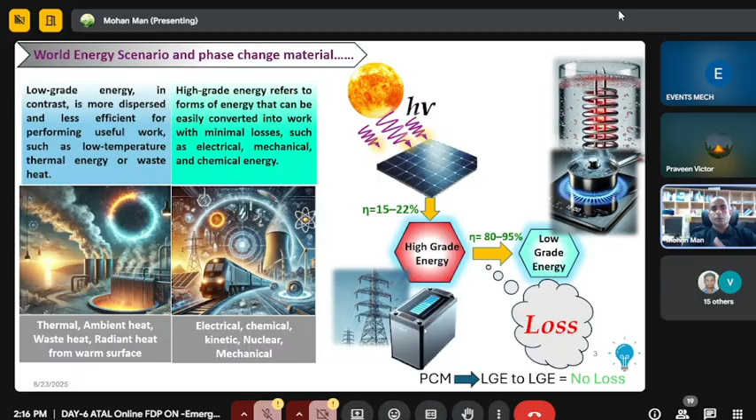Now I would like to introduce phase change material. First, I will introduce phase change material with ice and water, because it is a very fundamental material that we have known since childhood. Ice and water is a phase change material that exists in three phases: ice, water, and vapor. Based on temperature and pressure, the same material exists in three different phases. So I can consider it a phase change material because it interacts with heat and changes its phase. Whenever a material interacts with heat and changes its phase, I will consider it a phase change material. So the first example was ice and water.

Similarly, paraffin wax is the most common researched and even industrially applicable phase change material. Paraffin wax, or simply wax, is generally used in our daily life to make candles. So that is a phase change material, paraffin wax, which is an organic phase change material. And the third category is salt hydrate, that is also a phase change material. In the next slide, we will discuss salt hydrate.

What is the property? Salt hydrate is also a phase change material. Among these three, what I am showing in this slide is we can differentiate among them through the melting temperature or melting point. The lowest melting point or lowest phase change point of the three phase change materials is ice and water. After that, paraffin wax comes in the picture, with slightly more phase change temperature as compared to ice water. And the third one is salt hydrate, which has the highest phase change temperature among these three.

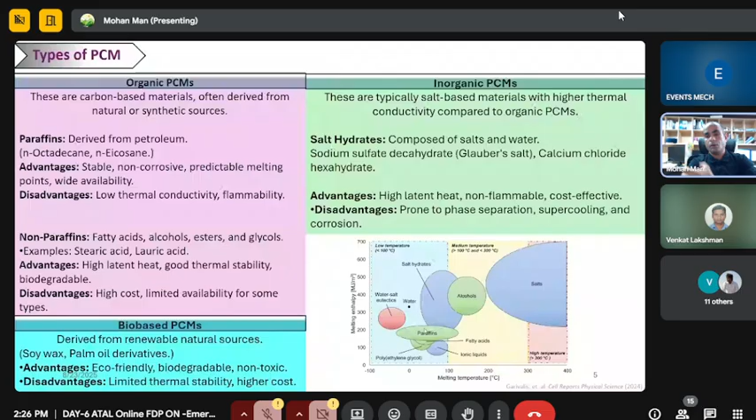Now, the fundamental principle of how phase change material works to store heat when used as a latent heat thermal energy storage. I would like to introduce latent heat and sensible heat. Before understanding the principle of phase change material, we should know sensible heat and latent heat. So first, sensible heat - what is sensible heat?

When the temperature changes and the material remains in its same phase, with no phase change, and temperature is continuously rising, that is considered sensible heat. Whereas when the temperature becomes constant and the phase of material changes, like from solid to liquid or liquid to solid, that is considered latent heat. So the thermal energy storage system works on two kinds of heat: sensible heat and latent heat.

So this presentation is basically meant for latent heat thermal energy storage, when the material is changing its phase, rather than sensible heating.

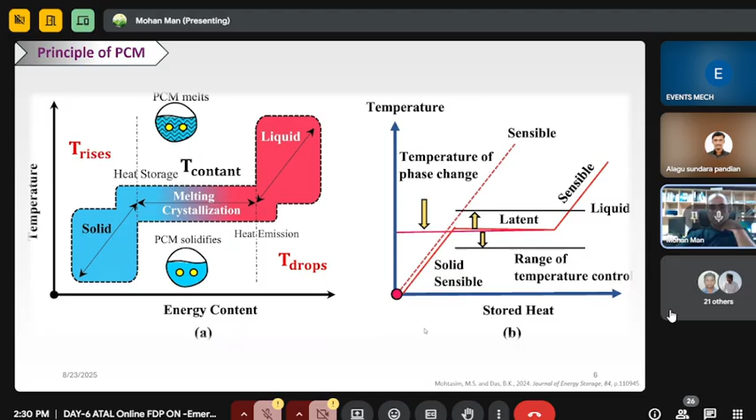Now, after this introduction of phase change material, the limitation of phase change material - this limitation, I can say, becomes the research area for phase change material. Basically, all kinds of phase change material suffer from low thermal conductivity.

You can see most of the PCMs, whether organic or bio-based, even inorganic and eutectic also, they have thermal conductivity in the range of 0.15 to 0.70. That is a very low thermal conductivity.

If you compare with the thermal conductivity of copper, we can say it is about 1,000 times lower than the copper thermal conductivity. So all these phase change materials always suffer from low thermal conductivity.

My major focus, as a material science background researcher and not from mechanical, is the inherent thermophysical property that deals with thermal conductivity. Apart from that, other thermophysical properties are also important, like latent heat, which we will discuss in the next slide. So thermal conductivity is a major challenge for phase change material to integrate for latent heat or thermal energy storage.

Apart from that, other limitations are also there for phase change material, like supercooling, phase separation, volumetric expansion, cost, corrosion, environment safety, and thermal stability. These kinds of limitations are also there.

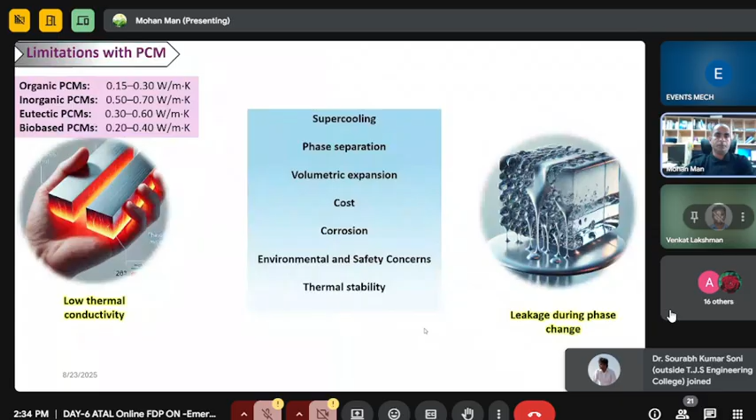Now, the required properties of phase change material. What properties are required from phase change material? These include thermal property, physical property, chemical property, as well as economical or practical consideration. Thermal property deals with high latent heat of fusion—whatever properties are mentioned here are required to develop a system. High latent heat of fusion ensures a significant amount of energy can be stored or released during the phase change. If the material has high latent heat, it can store more heat.

Then, appropriate phase transition temperature—it should match our input temperature. For example, if we are utilizing phase change material to store solar energy, connecting it with solar energy through a concentration solar collector, the temperature range will be based on the design, say around 80 or 120 degrees. So the phase change temperature of the material should match the input temperature, from where we are getting the heat.

Then high thermal conductivity is definitely needed for quick heat transfer during charging or discharging. Charging means melting of the phase change material, or storing heat; discharging means solidification, when it releases heat for utilization during the night time.

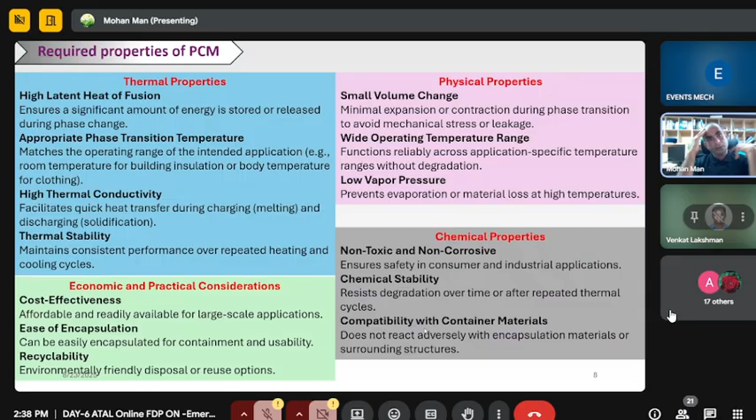Recyclability means that after a certain time period, say 2 years or 1 year, if we observe degradation in thermophysical property, the material will not perform as it did at first commissioning. In that case, if we want to recycle or dispose of that material, recyclability should also be considered. So these are some fundamental properties we need from phase change material.

Now we can see how the thermal energy storage material can be classified. Before starting the classification of the phase change material or thermal energy storage material, please consider this: sometimes I say phase change material, sometimes thermal energy storage material, because thermal energy storage material is a vast category. Different materials come under it, not only phase change material. Phase change material is one category of thermal energy storage material, so don't be confused between the two terms, PCM is a part of thermal energy storage material. As you can see in this picture, there are four types of thermal energy storage material, and phase change material is one of them.

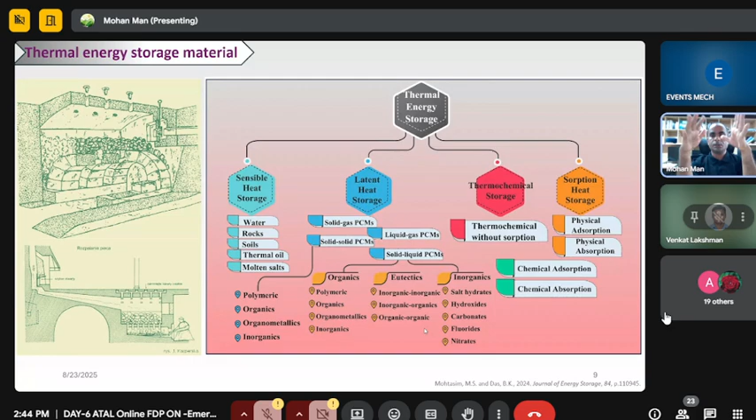But now the question can arise, why is TES implemented in this system? As I already told, TES is implemented to store heat during the availability of solar energy, to run the continuous cycle of this Rankine cycle, or whatever cycle is used to generate electricity. It is not possible to always get thermal energy from solar energy. So to store the heat for nighttime application to drive the continuous cycle, the thermal TES system is implemented through the phase change material.

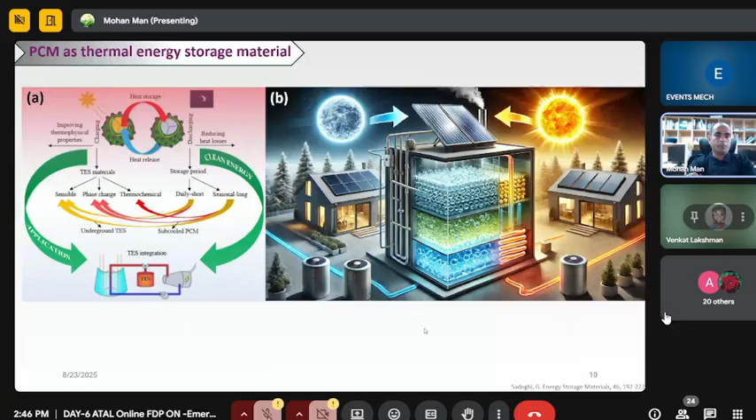Now, performance enhancement techniques for the thermal energy storage material. As we already discussed, phase change materials face certain limitations, particularly low thermal conductivity, which correlates with heat transfer. As the thermal conductivity is low, the heat transfer will also be low. So to improve the heat transfer, we definitely need to improve it. For any thermal application, heat transfer should be high. To improve heat transfer, we need to improve the thermal conductivity.

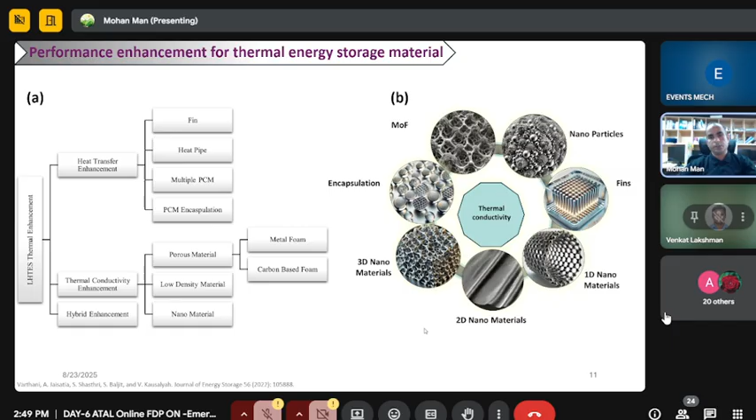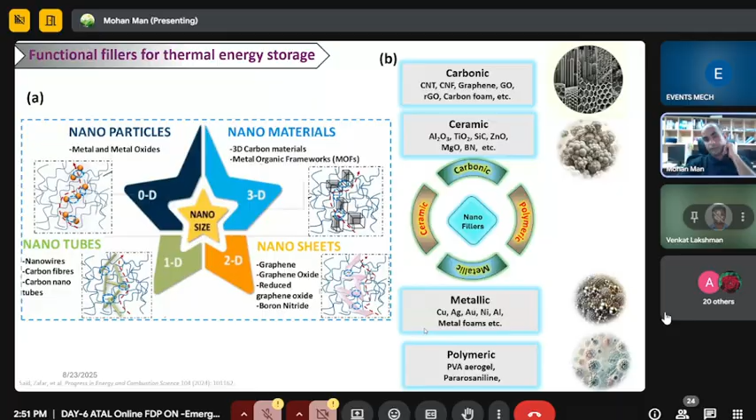Now the question arises, how can these 1D, 2D, or 3D fillers improve thermal conductivity? So, functional fillers and thermal performance. I am taking the example of CNT because it is the most widely employed functional filler for phase change material. Thermal conductivity through CNT increases significantly in PCM, enabling faster heat transfer during phase change. This improves the efficiency of energy storage and release.

Also for heat transfer, the addition of CNT reduces thermal resistance within the PCM matrix, ensuring uniform temperature distribution over all the material, so we get uniform heat storage in the phase change material or thermal energy storage system. High latent heat retention is another benefit.

One of the major disadvantages, apart from thermal conductivity, is that when we implement any functional filler in the phase change material, it reduces the latent heat capacity. The latent heat capacity of the phase change material reduces when we mix certain fillers. Why? Because the storage of heat takes place only in the phase change material, not in the functional filler, since the functional filler is not changing its phase. We store heat when the phase of the material is changing — basically we are storing latent heat. So who will store the latent heat? The material that is changing phase.

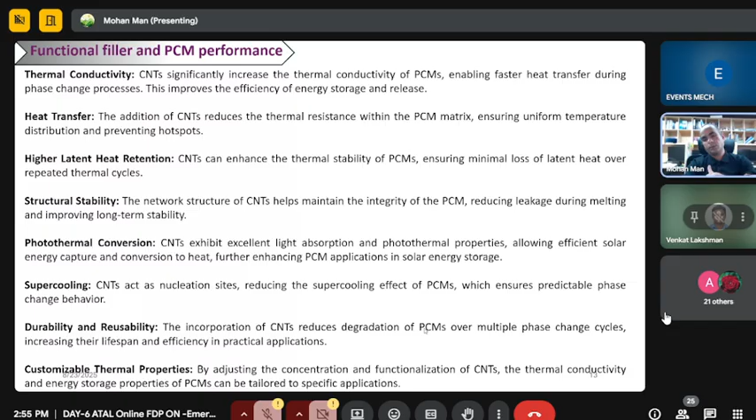Then there's supercooling, durability and reusability, and customized thermal property. Through CNT implementation, we can reduce supercooling because CNT acts as nucleation sites. When we mix CNT into the phase change material, it creates more nucleation sites, so the supercooling effect is reduced. For durability, CNT has such properties that we can use the phase change material for multiple cycles, improving durability. Also, by adjusting the concentration of the CNT functional filler, we can customize the thermophysical properties of the phase change material.

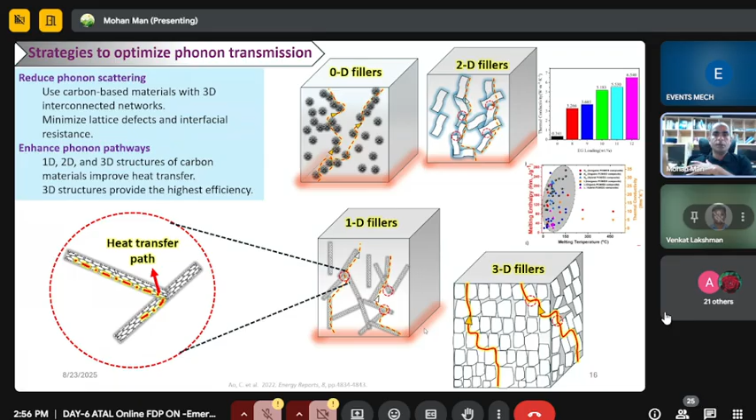Now, through this picture, I would like to explain how the functional filler improves thermal conductivity. Whatever the filler — 0D, 1D, 2D, or 3D — these all reduce phonon scattering, or in short, reduce the barrier to heat flow. We can say it provides a path: when we mix in the functional filler, it provides a path through which heat is transferred. These are the strategies that reduce thermal resistance and improve the thermal conductivity of the phase change material.

So phonon transport, what is it? Basically, phonon transport is responsible for heat transfer.

Phonon scattering is induced by the mismatch interface between the PCM and supporting material. Carbon material creates an efficient thermal pathway: a 1D material like CNT creates a linear path; a 2D material like graphene creates a planar, two-dimensional path; and 3D materials like carbon foam provide a network path that is more effective.

Through these 1D, 2D, or 3D materials, what we aim to do is reduce the thermal resistance, so that we get high heat transfer. Also, some chemical methods exist, like surface functionalization techniques, and through that we can also improve the thermal conductivity.

These chemical methods are for the functional filler, not for the composite. First we have to functionalize the nanofiller, then mix this filler with the phase change material, which will improve the thermal conductivity. So in these techniques, there are two types of functionalization: surface and chemical.

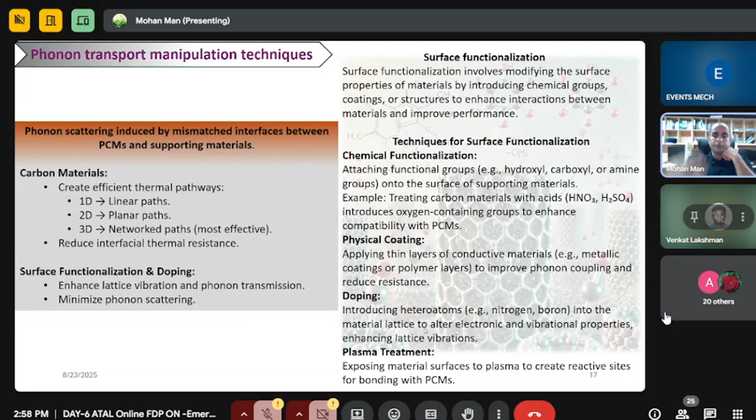So this is the conclusion on surface functionalization for thermal conductivity and surface functionalization for phonon scattering. Both are interconnected.

When we improve surface functionalization, it improves interfacial bonding, enhances phonon coupling, and aligns the lattice structure. This is a bit deeper into the material science background, so I'm not going to discuss it in more detail.

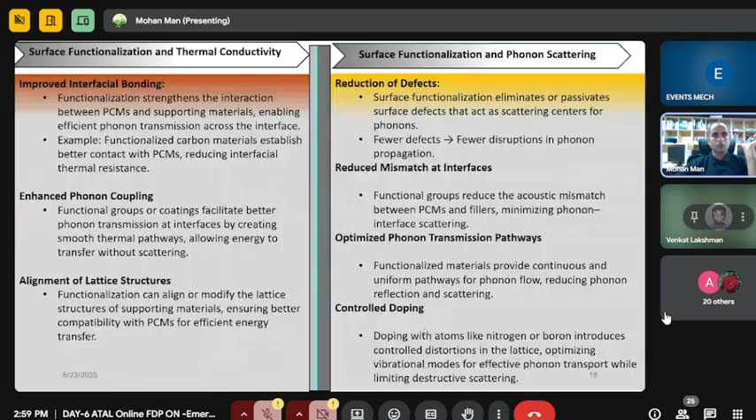I wish to show you some of my previous work, what we did using a similar approach to improve the thermal conductivity or thermophysical properties of the phase change material.

In our recent work, we mixed copper oxide functionalized CNT, meaning we decorated copper oxide nanoparticles on the CNT surface, so that we got improved results compared to pure CNT. Why? Because this additional attachment of copper oxide on the CNT surface creates more nucleation sites.

When the material changes phase from liquid to solid, there is a crystallization process. So if we mix this specific nanofiller, like copper oxide coated CNT, it creates more nucleation sites, so that we get a better response during the phase change. It will store more heat compared to pure CNT.

In this case, we synthesized the CNT, then mixed it with the phase change material through sonication. We prepared a uniformly distributed composite and obtained a solidified phase change material.

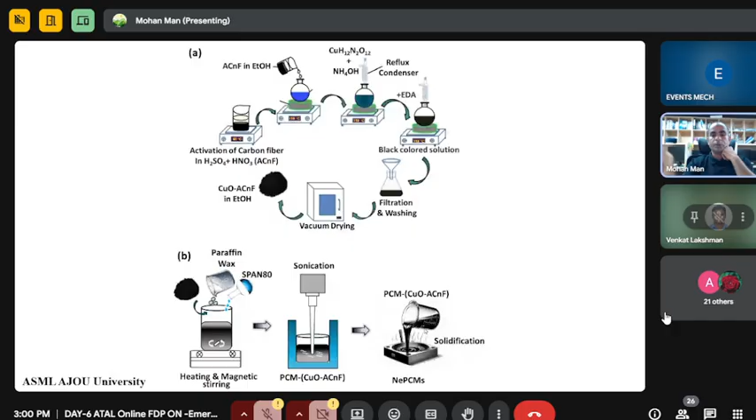After that, we did some chemical characterization to ensure the composite, to check whether any chemical reaction was taking place, through FTIR and Raman spectra. No such new chemical composition was observed. So we ensured that what we targeted was achieved without generating any new functional group.

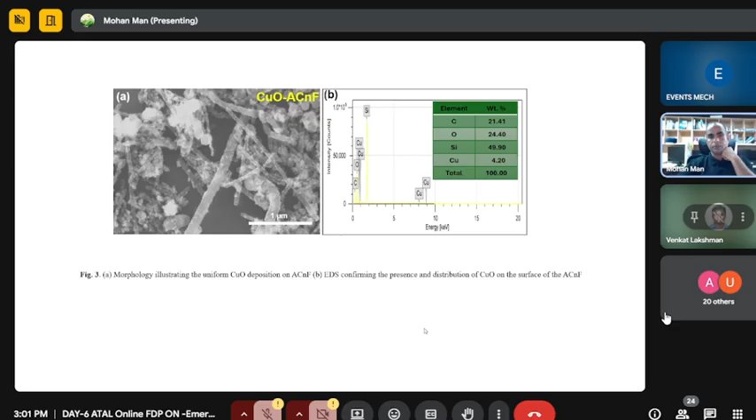So this is the distribution; we correlated the distribution. I would also like to introduce the importance of the distribution of the functional filler in the phase change material while synthesizing the composite. So we analyzed how the distribution of this filler influences the thermophysical properties of the phase change material.

We prepared four samples, changing the weight percent ratio of the functional filler in the PCM, and analyzed the distribution. We did thermal analysis - TGA, DSC, and thermal conductivity - and got significant results showing that such a functional filler, chemically functionalized CNT, gives higher thermal conductivity compared to pure CNTs.

The xenon bulb has been kept on top of our sample, which is paraffin wax mixed with copper oxide coated CNT, and we analyze how the temperature of the phase change material is changing.

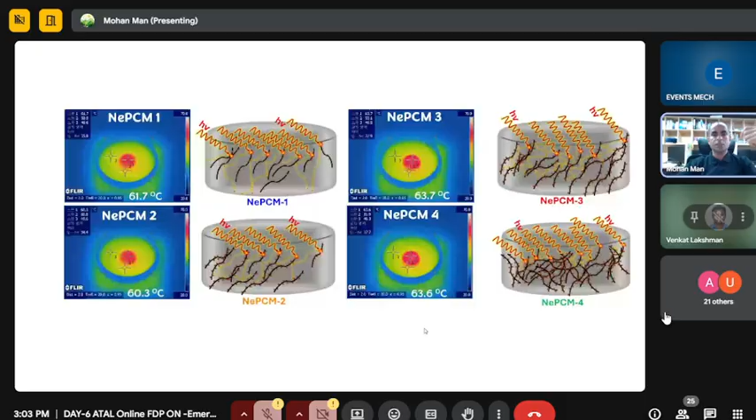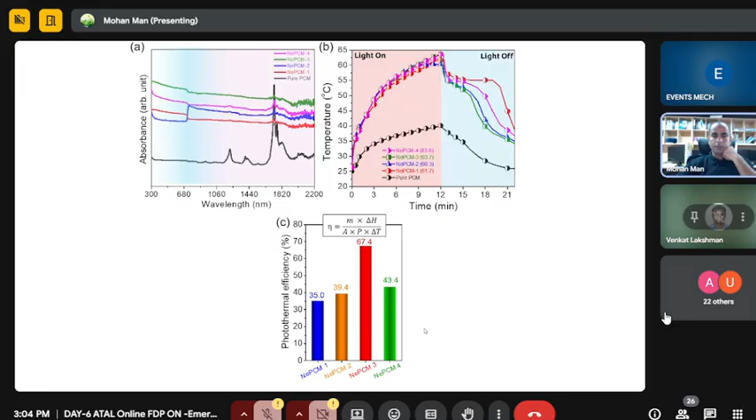Through this we can understand the importance of the functional filler. If we mix in a functional filler, the melting temperature can be achieved directly through solar light without any heat transfer fluid. So this kind of material can be utilized to store direct solar heat as latent heat energy storage material. We have also achieved a photothermal efficiency around 67.4%, which is a significant achievement with the copper oxide coated CNT mixed with paraffin wax.

The temperature drop of the CPU microprocessor has been analyzed with the PCM, because when the computer is processing, it generates heat. That heat needs to be taken away from the microprocessor, so we employed the phase change material to remove the heat.

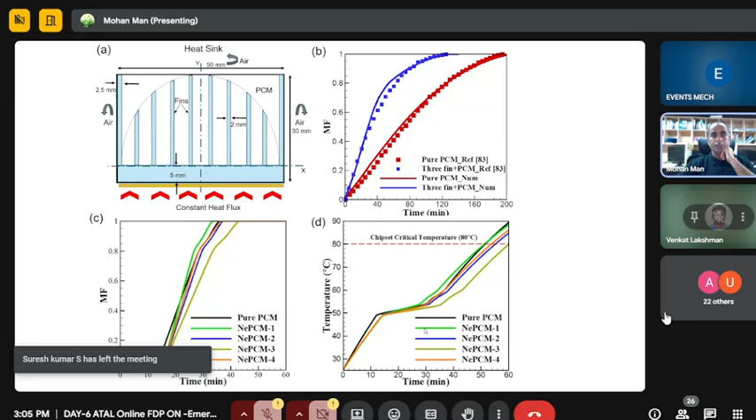So these are some results. I think this is another part, which I would like to show very briefly: multifunctional PCM. So far what I discussed is the thermal energy aspect. Now, regarding multifunctional PCM, I would like to say PCM cannot be used only to store heat.

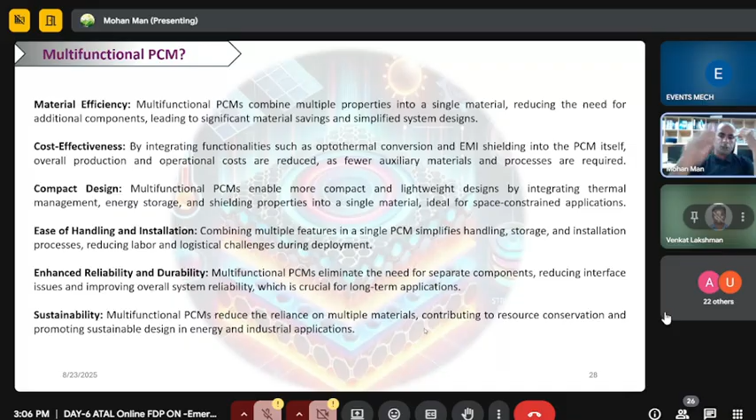Nowadays, when material efficiency, effectiveness, or conclusively sustainability is considered, if we are synthesizing a material, it should perform multiple tasks, not only thermal energy storage. In the case of PCM, it should not perform only one application, that is heat storage. Instead, we should aim for different applications, as I will show in the next slide.

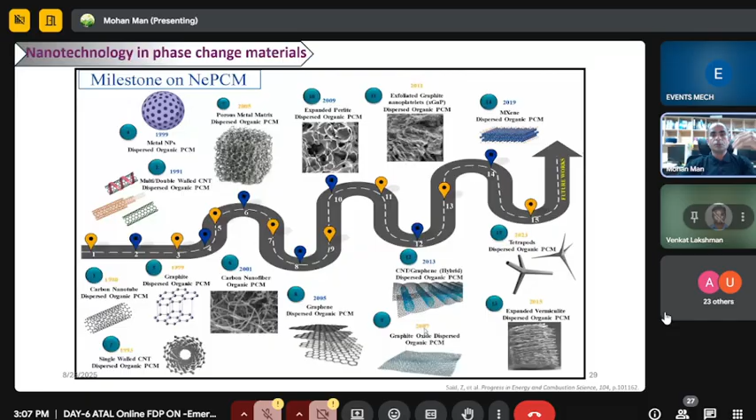This is the milestone timeline of phase change material for multiple applications. It starts from 1990 with CNT and has progressively increased; by 2021 nanomaterials like tetrapods have been utilized. Tetrapod is a specific design created by the chemical reaction of carbon material. So from fundamentals with CNT, development has taken place through different materials like CNT, graphene oxide, and others such as MXene. By 2023, various tailored materials have been designed and mixed with paraffin wax, or in general functional material, to get the desired thermal conductivity or designed thermophysical properties.

For multifunctional application, beyond just energy storage, PCM can perform different applications like cooling and heating of buildings, cooling and heating of wearables like jackets, or in life science. Thermoelectric generation: if we can create a temperature difference, certain thermoelectric modules can utilize that difference to create electricity. Similarly, electromagnetic shielding: if we synthesize a phase change material with certain nanofillers, that will restrict electromagnetic waves. Other applications include photothermal conversion and greenhouse effects, where we can use the phase change material between the walls of a greenhouse to maintain temperature. So phase change material is not only for storing heat, it can be used for different applications as well.

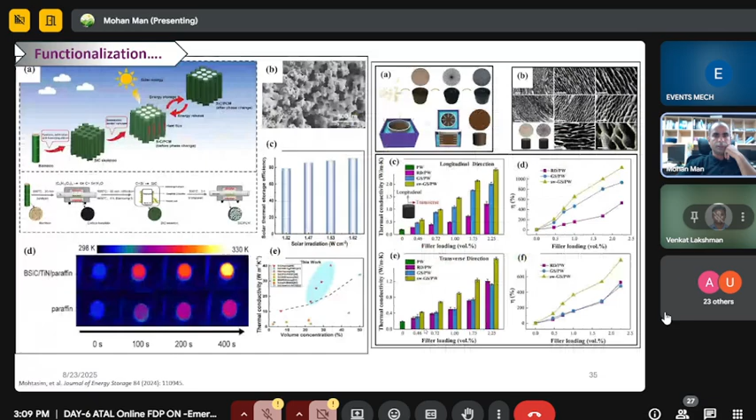These are some chemical structures which we will not discuss in detail.

Automatically a temperature difference will be created, and this difference can be utilized to generate thermoelectric energy. This is one application of thermoelectric conversion through phase change material. Even though the thermoelectric module can be implemented through different temperature differences, PCM can help generate a certain temperature difference even when there is no availability of a heat source. Why? Because PCM stores heat in the daytime and retains it even after the heat source disappears. After that, this heat can also be utilized in the thermoelectric module.

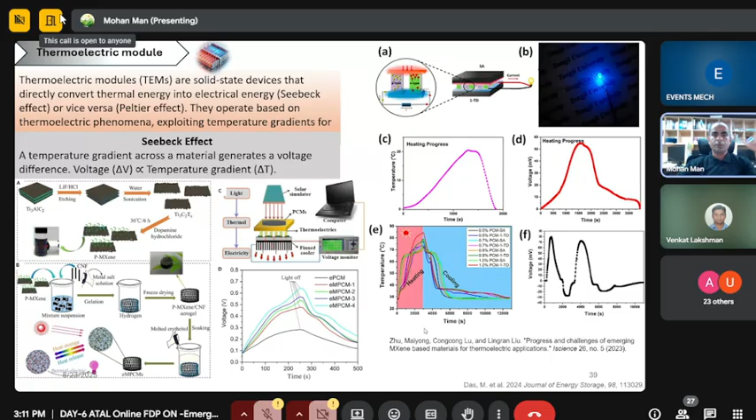This is a photothermal conversion setup. You can see in this picture, when light is incident, the temperature of the material rises, and further this connects to the thermoelectric module. Then again the temperature difference is created and utilized to generate electricity. These are some examples and research work for photothermal conversion.

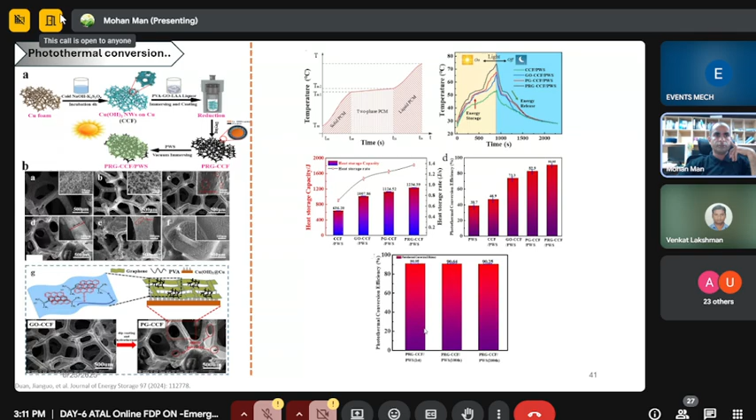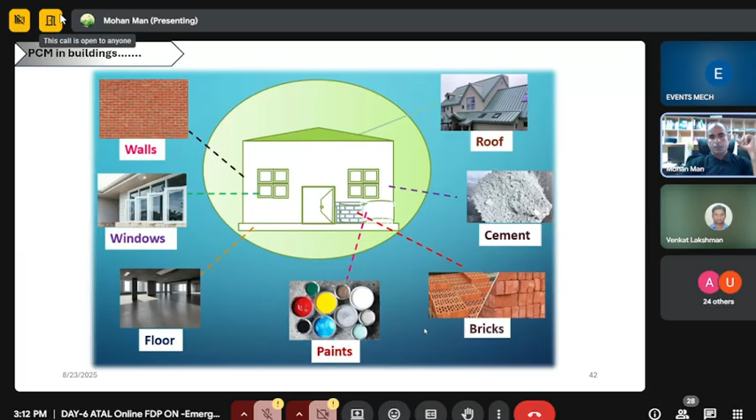Another application is the building application of phase change material. In building applications, research is going on where phase change material is filled among the walls, windows, floors, and even in bricks. The bricks are not usual bricks; they have a hollow space where phase change material is filled. This restricts heat from penetrating the wall and keeps the house cold in summer, because when heat tries to enter the wall, the PCM filled among the walls and bricks starts melting, and the heat does not further go towards the inside room. This is an example of phase change material in buildings.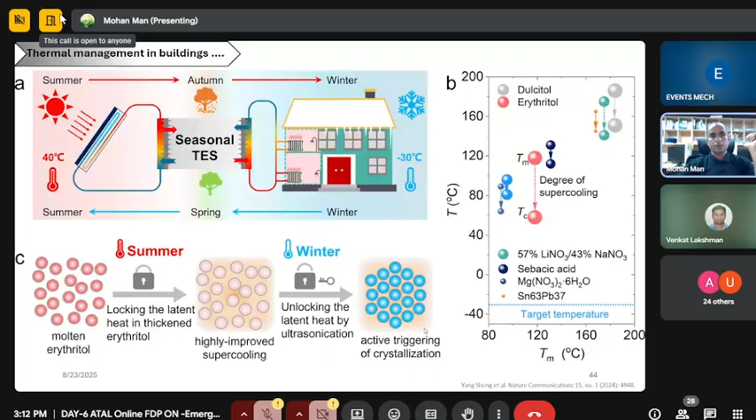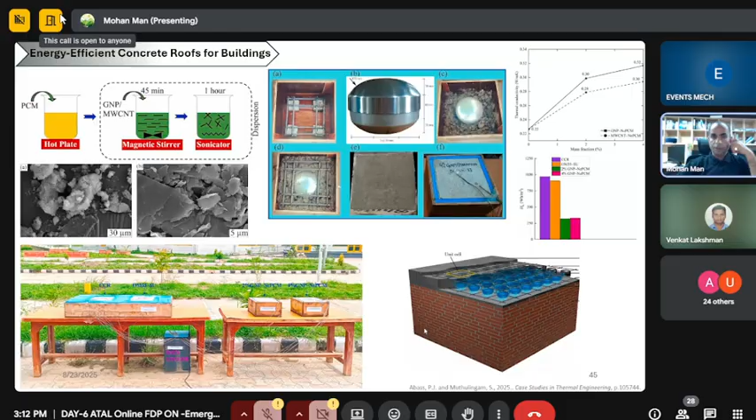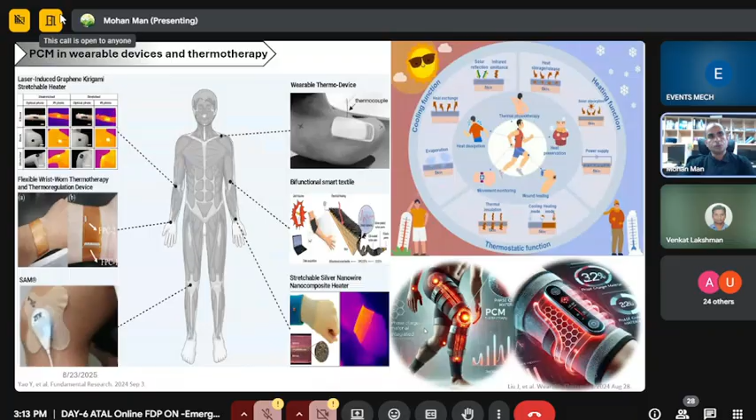This is the latest research going on nowadays with PCM. PCM has been developed for flexibility, so that flexible PCM can be attached for medical therapy and thermal therapy, to get a thermal effect in the body. If we have pain at a certain region that needs to be treated through heating, thermal patches are developed. These patches are made with phase change material, and if we wear that phase change material embedded patches on our body and move in solar light, the patches will automatically get warm and provide thermal therapy for the affected area. This is the latest research in flexible phase change material.

These are considerations for phase change material based wearables for flexible phase change material. The material should store high energy and have material compatibility. It should be chemically stable over a long period to prevent degradation, and it should be compatible with textiles, not causing structural damage to the textile or cloth. Regarding encapsulation and leakage, the material should be easy to encapsulate so that thermal patches can be designed, maintaining thermal property while ensuring flexibility. Otherwise, if worn, the material will not be flexible and the patches will become broken.

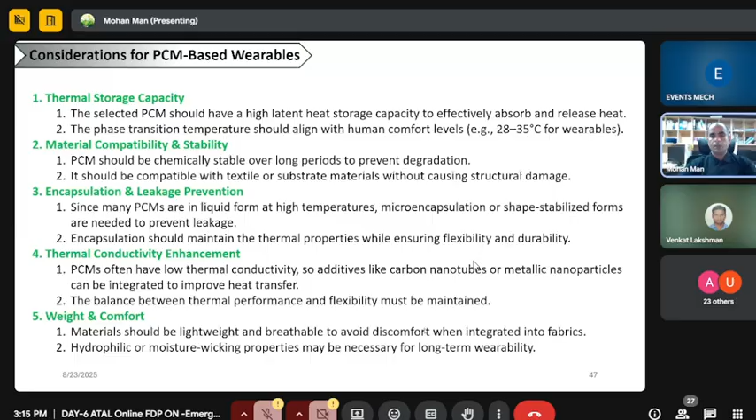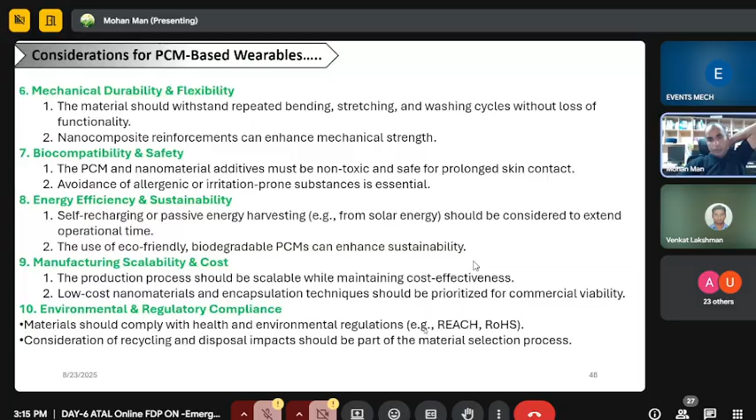Thermal conductivity should also be high, so additives like carbon nanotubes and metallic nanoparticles are integrated to improve thermal conductivity. The weight of the material should be very low, so it is lightweight and breathable to avoid discomfort for the wearer when integrated into fabrics. Similarly, mechanical durability and biocompatibility are important; biocompatible materials should be used so it is non-toxic for safe and long-term skin contact, since someone is going to wear this material. Manufacturing cost should be low, and environmental and regulatory compliance should be followed by the phase change material.

This is another application of phase change material, and I would like to conclude with this application: desalination of water. To convert sea water or brackish water to potable water, phase change material plays an important role. Without electricity, if we want to convert salt water into drinking water, it is possible during the daytime through solar light. But what about when solar light is not available? In that case, we can store heat in the phase change material, and after sunset, the same stored energy can be utilized for the desalination process, so that continuous output of the desalination technology can be achieved through phase change material.

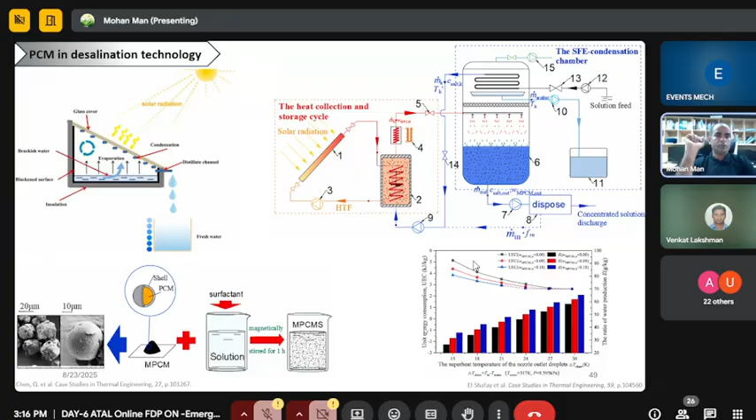So at last I can conclude that phase change materials have long been recognized for their role in thermal energy storage, offering latent heat capacity and enabling efficient thermal regulation across various applications. However, conventional PCMs face significant challenges, as we already discussed, like thermal conductivity, phase segregation, and supercooling, that can lower the practical deployment of phase change materials in advanced energy systems.

So the integration of nanotechnology through nanomaterials can transform this approach and overcome these challenges. A key advancement is enhancement of thermal conductivity and optimized structural stability through nanostructured fillers. If we implement these kinds of fillers, it will reduce phase segregation, leakage issues, and improve durability over repeated cycles. Such fillers, whether 1D, 2D, or 3D, will also improve photothermal conversion, which improves the implementation of phase change materials for direct solar-to-heat storage.

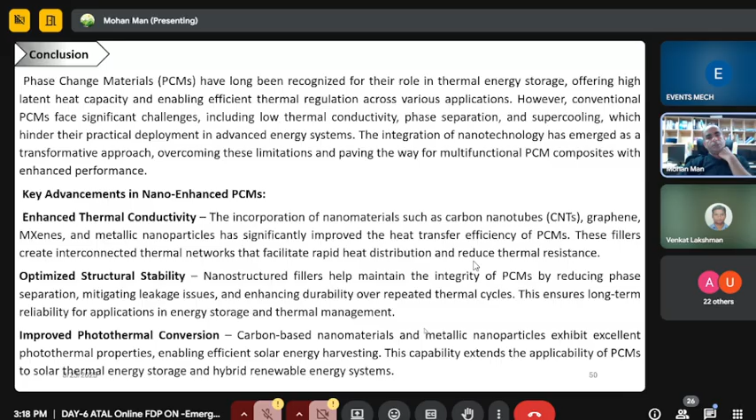For supercooling suppression, certain nanofillers will increase the nucleation sites through nanomaterials, which minimizes the supercooling effect and ensures the phase transition, enhancing thermal conductivity or thermal regulation efficiency of the phase change material composite.

Even for multifunctionality, the integration of nanotechnology allows the PCM to exhibit additional functionality apart from the thermal aspect. It will improve other aspects also, like electromagnetic shielding, optothermal or photothermal conversion. It provides mechanical strength for the phase change material, particularly when we are dealing with flexible phase change materials. So these nanofillers improve the multifunctionality of the phase change material composites.

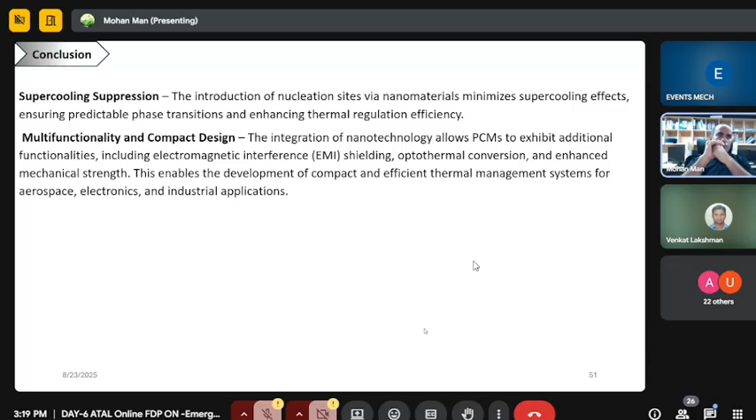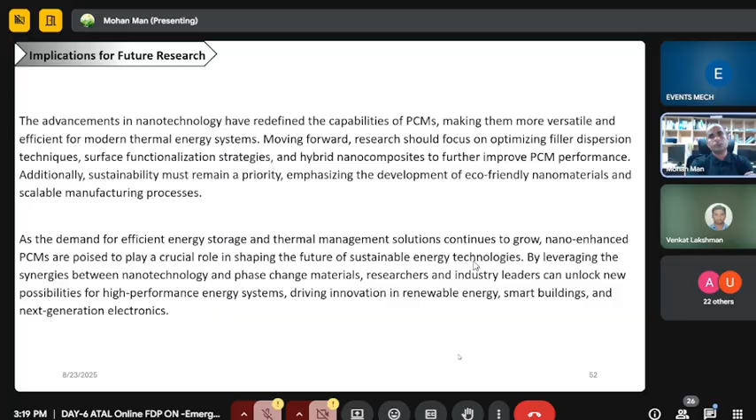So for future research, we can consider the advancement of nanotechnology that redefines the capabilities of PCM, making them more versatile and efficient for modern thermal energy storage applications. Moving forward in PCM composite research, we should focus on optimized filler dispersion techniques, since we already saw that dispersion of the nanofiller in the PCM composite plays a significant role in thermophysical properties. We can also consider surface functionalization strategies and hybrid nanocomposites to improve PCM performance.

Additionally, sustainability should be a top priority, emphasizing the development of eco-friendly nanomaterials, because most of the materials used in current research are not eco-friendly—they are chemically treated materials. So we should consider eco-friendly nanomaterials, and they should be scalable for the manufacturing process also. Developing such materials at an R&D scale is okay, but the material should also be scalable for manufacturing.

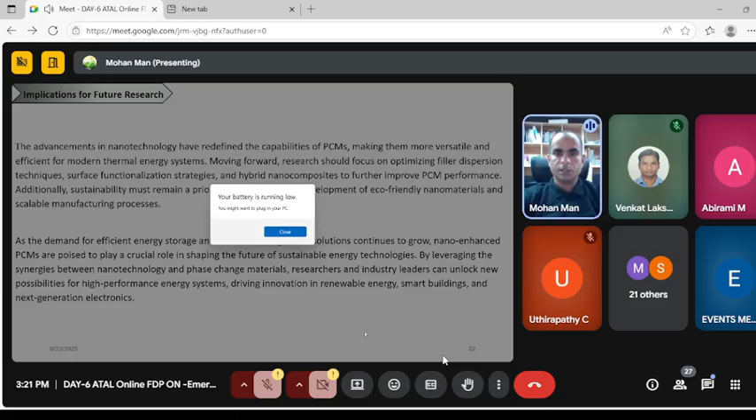As the demand for efficient energy storage and thermal management solutions continues to grow, nano-enhanced PCMs are poised to play a critical role in shaping the future of sustainable energy technologies. By utilizing the synergy between nanotechnology and phase change materials, researchers and industry leaders can unlock new possibilities for high-performance energy systems, driving innovation in renewable energy, smart buildings, and next-generation electronics. So these are some of the future research directions we can consider for phase change material based thermal energy storage applications.